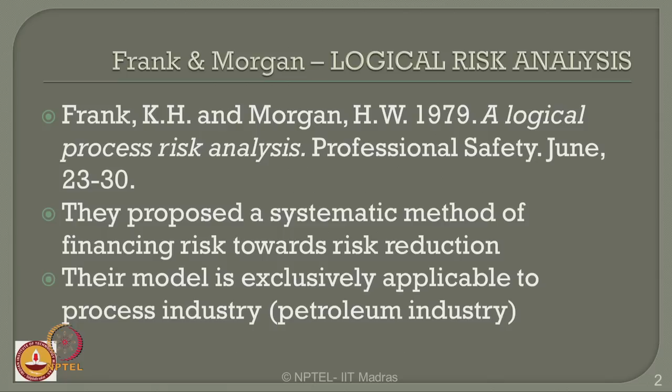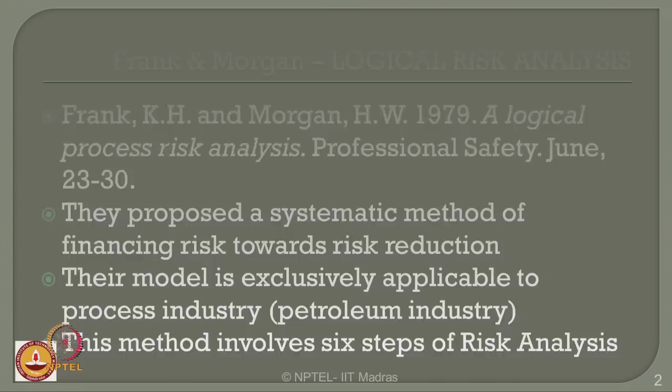Their model is exclusively applicable to any process industry, and we all agree that the oil and gas industry is a process industry. Therefore, one can apply this method to the oil and gas industry very interestingly. This method of course has 6 steps of risk analysis. Let us see them one by one quickly. In step number 1, you compute the risk index of each department.

One can ask me a question, what do we mean by department? You know, every production unit has got different segments. For example, inventory, stores management, sales, personnel safety, production unit, drilling. So, there can be different departments in every production unit. So, let us say I want to calculate the risk index of every department.

In the next step, I estimate the relative risk of each department. I will compare every department with one another and try to estimate a relativity factor between departments. Then I will compute the risk index in percentage, that is why it is called percent risk index for each department. Then one will compute the composite exposure dollars for each department. In this step we are converting the analyzed risk to economical terms, that is why we say exposure dollars.

Then you compute composite risk for every department. Once you do this, in the last step you rank the departments based upon relative risk score. So, one has to actually rate the department depending upon the risk score. We will take up an example and solve it and see how the different departments can be relatively ranked purely in terms of risk analysis.

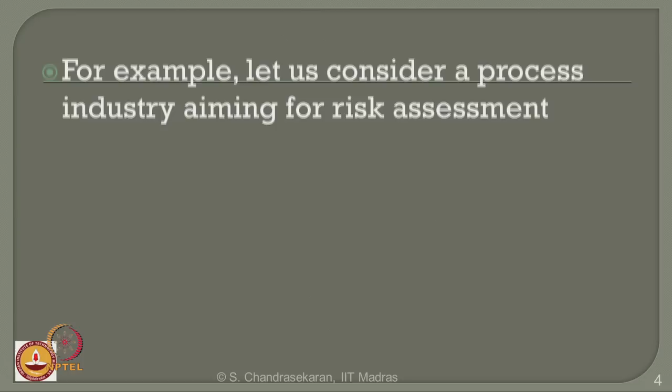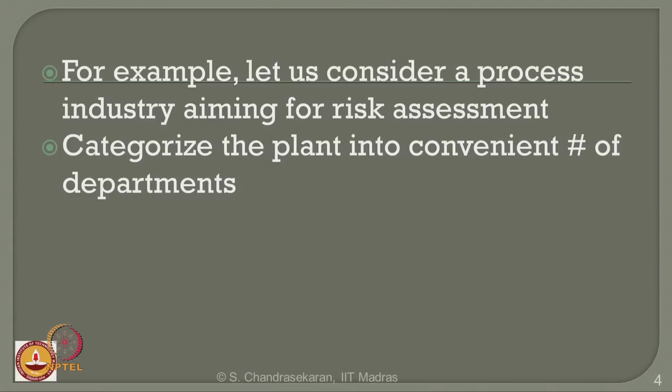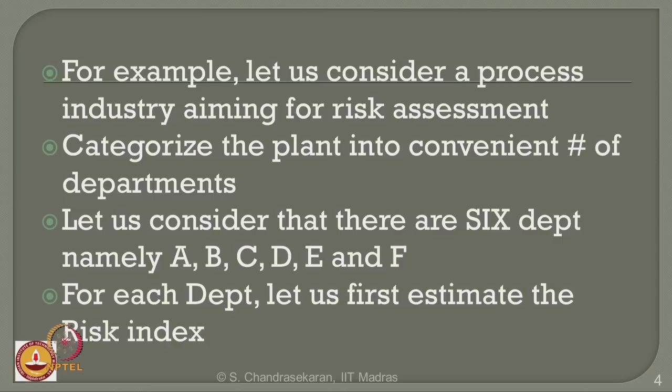Let us consider a process industry aiming for risk assessment. Categorize this industry or the plant into a convenient number of departments. Let us say there are 6 departments in a given plant, named A, B, C, D, E and F. For each department, let us first compute the risk index.

Now, the question comes, what is a risk index? Each department inherently has a risk level. This is to be first identified. It can be done by evaluating hazards present and the control measures available within the department. So, every department has hazardous scenarios in their presence. There are of course control measures available within each department. Comparing these two, I can always calculate the risk level of each department.

This is also otherwise called first level of risk assessment in every department. Generally, it is done by ascertaining this from a checklist. A sample checklist developed by Morgan will be shown in the next slide. So, based upon this, one can establish a hazard score and a control score. This is a sample list which is shown to you to ascertain the hazard score and the control score.

The hazard score or the hazard group, there are 6 groups here: 1, 2, 3, 4, 5 and 6 groups. For example, the first group is on a 10-point scale of weightage, which is on fire and explosion potential. The second is on complexity of the process on an 8-point weighted scale, stability of the process, operating pressure involved, personal environmental hazard potential existing and high temperature problems. Each division has a specific weightage of 10, 8, 7, 6, 4 and 2 respectively. Each one of them has got different categories within them. Each category has got a relative weightage.

So, what I have got to do is, if my specific department in a given plant has a large inventory of flammables, then I will take that score as 2, multiply that by 10 and form this value as 20. If I have large inventory flammables and also they are generally distributed within the department and they are not localized, then my score will be 2 plus 2, 4, multiply with the weightage, it becomes 40. So, for every group I can now find out the score of hazard. Once I do this, then I will estimate what is the control score.

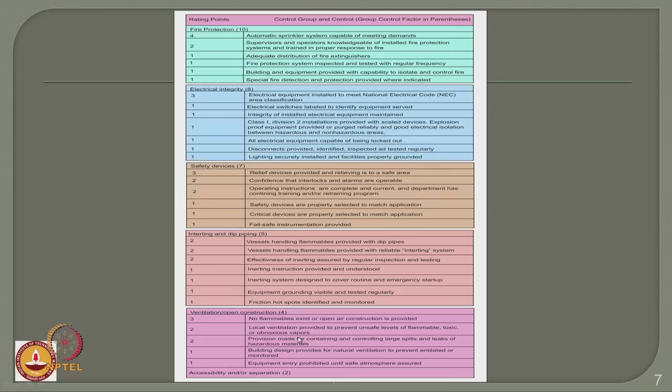Then for example, if your department has an automatic sprinkler system in position, then your control score for that group will be 4. Since the weightage of fire protection is 10, your control score for this group now becomes 40. If your department also has adequate distribution of fire extinguishers in the entire area of working, then you have an additional score of 1. So, your total score becomes 5 because 4 plus 1 is 5, multiply this with 10, you get 50. So, for every group one can easily calculate these scores as a control score. From the previous slide, one can calculate these scores as a hazard score. Compare these two scores to form risk index.

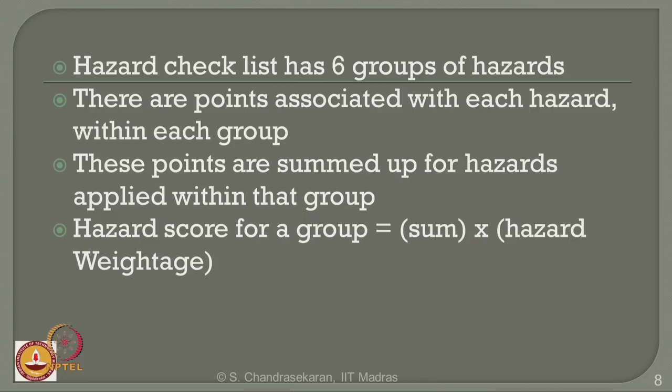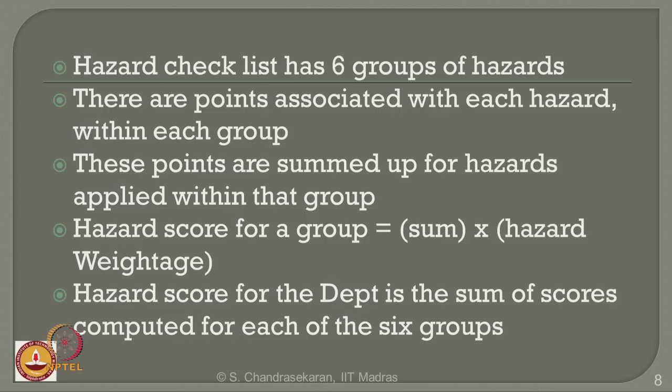So, hazard checklist has 6 groups, they are associated with each hazard. These points are summed up within that group. Therefore, hazard score can be simply the sum multiplied by the weightage for each group as I explained just now. So, hazard score for each department is now sum of the scores of all the 6 groups as you have seen in the last table. Similarly, you can also calculate the control score. The control score for every department is again the sum of scores of each of the 6 groups. Therefore, now the risk index can be computed for each department.

Risk index is control score minus hazard score. Please understand, it is not the difference between the control score and the hazard score. It is control score minus hazard score. One can ask an interesting question here. If my control score is higher than the hazard score for a given department, risk index will be positive. If my control score is lower than the hazard score for a given department, risk index can be negative. So, it is very simple, risk index can either be positive or negative. If the control score is exactly the same as the hazard score of the department, risk index can even become 0.

Now, I calculate relative risk. One can ask me a question, why I am interested in calculating relative risk. So far, I have been calculating risk index of every department in a given plant individually, but of course, I want to compare the departments. One can ask me a question, why should I compare the risk of every department within a given plant? Now, get back to the definition of safety. Safety is not only violation of individual personnel, but also a group of violations getting aligned for the organization together.

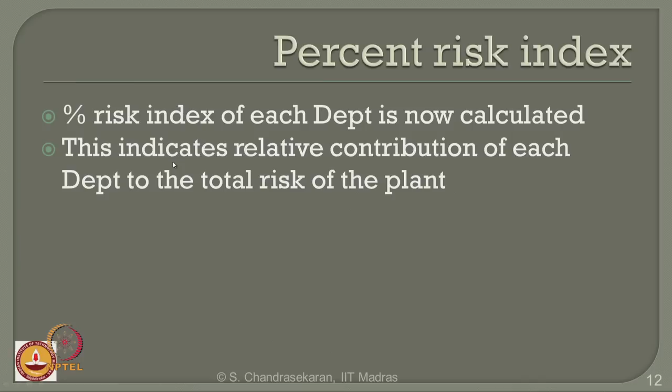It is very important to know here that every department will know its own contribution of risk to the overall plant. For example, A contributes 10% of risk, B contributes 20% of risk. So the department which contributes the maximum will have to be paid more attention by the organization. At this level itself, you will easily understand which department should be focused on in terms of safety assurance programs, or which department should be revisited for improvising safety in stringent terms.

So this level of analysis will also help the organization ascertain the level of safety being practiced in each department, as a control mechanism for awarding or rewarding each department.

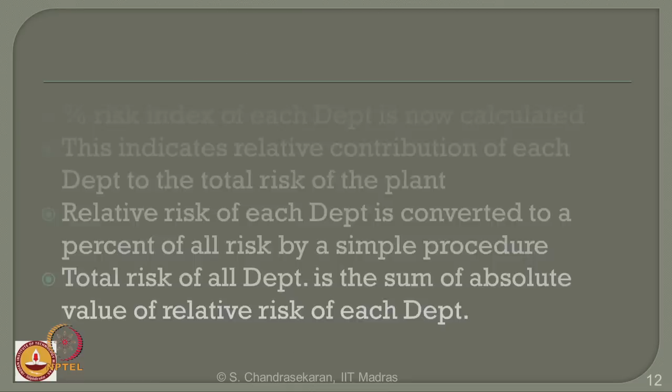Relative risk of each department is then converted to percentage by a simple procedure. The total risk of all departments will be the sum of the absolute value of relative risk of each department, which will amount to 100%. Now, one can ask me a question. So far we have ascertained the risk of individual departments and compared them on a relative scale. Where does the finance part enter here? Because Morgan focused on financing risk, Frank and Morgan.

Where is the financing part coming here? The financing part comes in this area of risk analysis, where I am going to say composite exposure dollars. There are three terms available here. Why composite? Why exposure? Why dollars?

Dollars indicate it is a financial aspect, the economical purview of risk analysis, whereas composite and exposure explain how risk is converted in terms of economy. The estimated risk is converted to financial values, estimating the financial value of risk for each department.

Composite has different segments involved in risk analysis, like property asset, business interruption, and personnel exposure. So three segments are involved in ascertaining risk. Each one is valued separately so that the total risk involved in terms of economy is also focused. Now, how do we estimate these components in terms of composite exposure dollars?

If we talk about property value, it is actually the estimated value of replacing the cost of all material and equipment which are at risk in each department.

There is an example here. There are 6 departments: A, B, C, D, E and F, where the hazard scores as explained earlier are computed, the control score as explained earlier are computed, the property value, business interruption, and composite score are computed, and this becomes an input table to do the risk analysis.

Either you can use Frank and Morgan's charts to compute the hazard score and control score of your department, or you can prepare your own chart to use these department scores separately. So this becomes input data for each department. I say this is the given data for the problem.

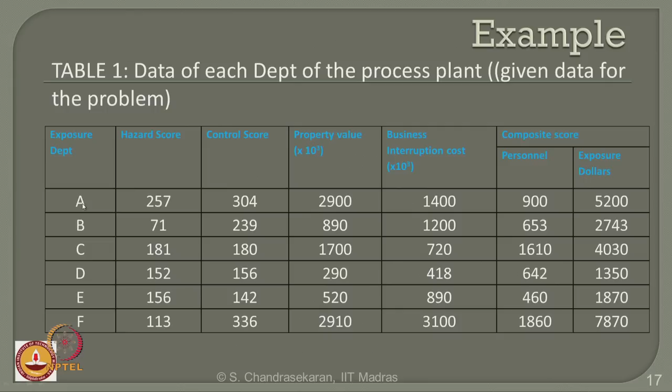Now I attach the values of these numbers which I took from the previous table. For example, plant A, department A has 5200. The exposure dollar scores of each department, A, B, C, etc., are worked out as input data which I transferred to the next table.

All these values I got are essentially input data which I computed from the known chart for every department. So now we have two levels of analysis. One, we now know amongst the given departments which department is contributing to the maximum risk of the whole plant. We also know the asset and involvement of the department in terms of money.

Here it is exposure dollars, and for realistic figures I have multiplied these numbers by 10 power 3. So these numbers are not simply $5,200, they are 5200 times 10 power 3 US dollars. That is the commercial meaning of these numbers.

Now very interestingly, if you look here, department E had the maximum percentage risk. Since the inventory, property asset, manufacturing, or personnel involved in department E amounts to only 1870, compared to department A, which has the highest.

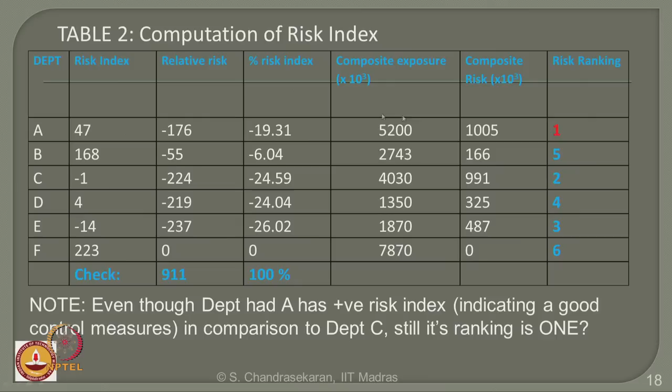So this analysis not only discusses the risk involvement in the department, it also tells me how the risk can be converted into economical terms, which is very important for any production plant like the oil and gas industry.

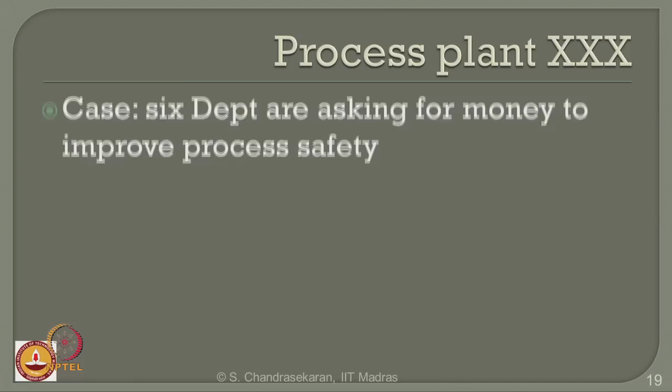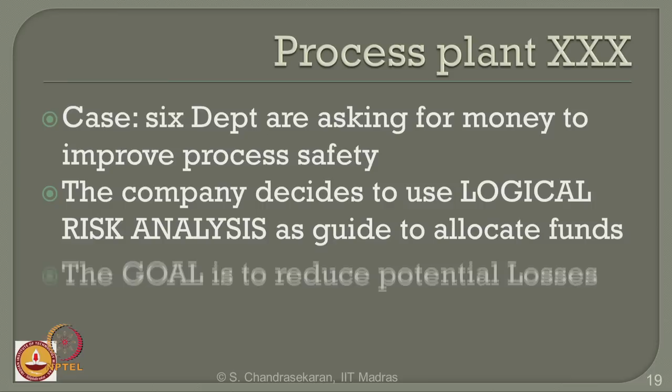Let us take another example, a process plant XXX. Six departments are asking for money to improve process safety in a given plant. The company decides to use logical risk analysis as a guide to allocate funds from the budget. The goal of the company is to reduce the potential loss. Morgan's method is one of the best tools employed for solving such problems.

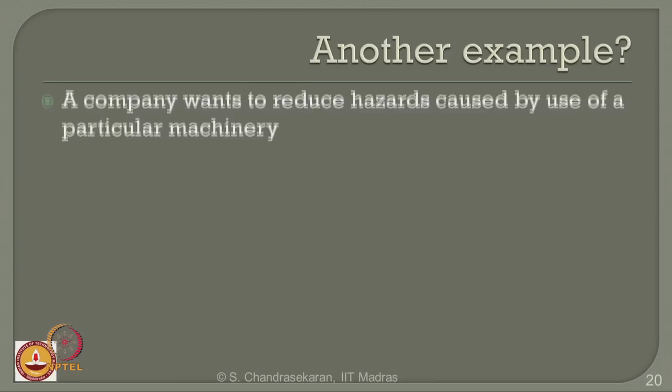Let us take another example. A company wants to reduce hazards caused by use of a particular machinery. It is a new machine which has a high potential for accidents, so it must be operated with care.

Now there are 2 options available with the company. Option A: the company appoints a trained person all the time, 24/7, who will assist operation of the machine because he will be trained. Next, the company also proposes to fix an interlock to the machinery which will reduce such hazards so that accidents can be reduced.

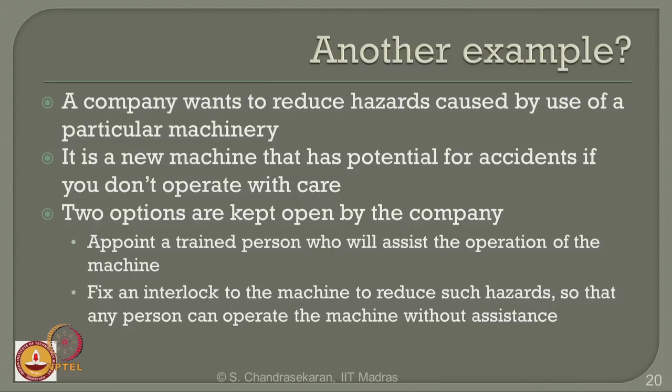So the company has 2 options. It can either hire a trained person round the clock so that the machine operation is done through the person, or by the person under the direction of an instructor, or the mechanism can be with an interlock. Let us see which is the better mechanism by which risk can be reduced.

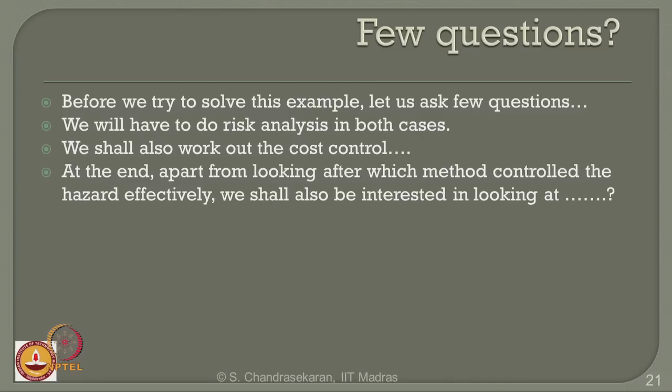Now, there are few questions asked before we solve this problem. Before we try to solve this problem, we will have to do risk analysis in both the cases, option A, option B; both risk analyses are mandatory. We shall also work out the cost control in both the cases because that is important. At the end, apart from looking at which method controls the hazard effectively, we should also see another factor which is very important for an investor.

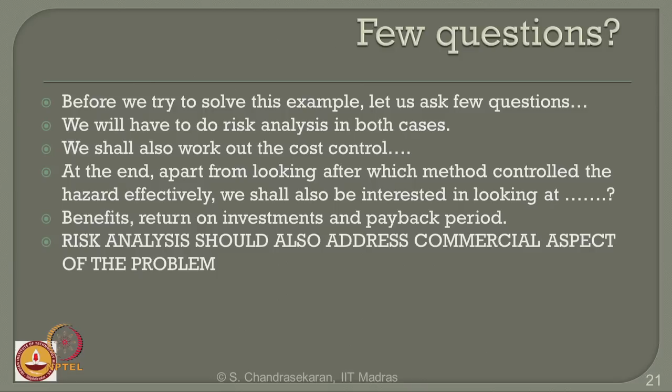What is that factor? The factor is what is the benefit I derive, what is the return on investment I get, what is the payback period I get on my investment. That is very important. The risk analysis therefore should also focus on the commercial aspect of the problem. Risk mitigation and reduction without knowing the financial impact is not useful in all companies.

So, let us solve this example. I have got 2 options, option A and option B. Step A says hazard using a machinery. Frequency per year in both the cases is 3 and 3. I want to maintain both of them the same so that there is no difference between option A, using a trainer, and option B, using an interlock to the machinery.

Let us see what is the severity of an accident, that is, expected loss every year. I want to keep the expected loss in both the cases the same so that I can compare them very easily. Now, I want to see what is the risk involved in each case. Risk involved is actually the product of these two, because we know risk is a product of frequency and consequence. I want to keep both the risk levels the same, but I really want to know which option will be better for a financial investor as well as for a manager.

Then I say what is the control mechanism available. In option A, I employ a trainer. In option B, I put an interlock. Therefore, the control effectiveness in both the cases should depend on what is the initial investment. The investment is higher in option A because I have got to hire this person round the clock, whereas the cost of this lock can be cheaper because this can be bargained when you purchase the machinery.

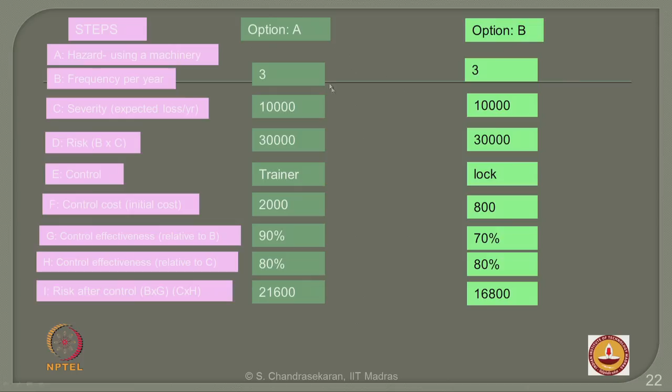Risk after control is nothing but the product of effectiveness of the cost and effectiveness of control. So B product G multiplied with C product H. I compute this, and now there is a significant difference, and risk after control is higher in case of option A compared to that of option B.

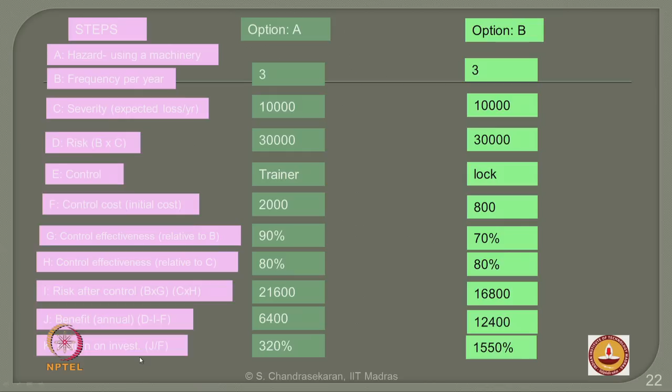Now what is the benefit annual which is drawn from this? So it is nothing but the risk involved minus the investment minus the control effectiveness. I get this value as 6400, whereas the benefit I draw from option B is much higher than that of option A. Now what is the return on investment? That is very interesting. I may derive a higher benefit, but am I able to get the return much higher? I have calculated this as percentage.

One can ask a question, how have I done that? Okay, what is the payback period? How would you do that? It is very interesting. I have derived a benefit of 6400 in a year, that is 533 per month. Therefore I have invested 2000 rupees, approximately I will get this money back in 4 months, whereas here I have invested only 800 rupees, I will get this money back in just 3 weeks.

So return on investment or payback period becomes a very important aspect of any mechanism or any plant or any investor who controls risk. So this is a very interesting example where risk control mechanism has been given a complete illustration in terms of economic perspective.

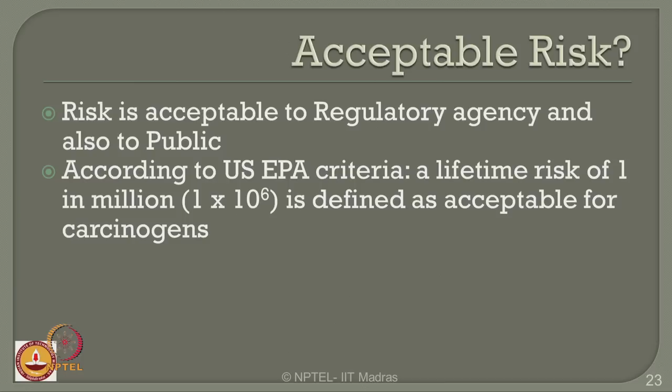Once we understand this, we should also agree that there is some acceptable level of risk in oil and gas industry. Risk is acceptable to regulatory agency and also to public. According to US EPA criteria, a lifetime risk of 1 in million is defined as acceptable risk for carcinogens. For non-carcinogens, this acceptable level of risk is hazard index of less than 1. According to UK Health and Safety Executive, the acceptable FAR is 1.0. These are acceptable risk statements.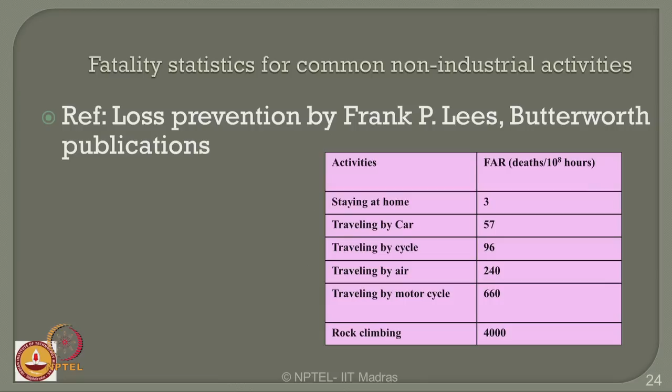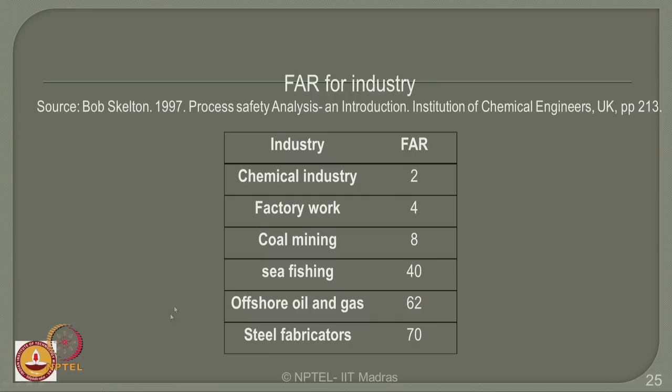Now one can ask a question, why traveling by motorcycle compared to that of air has got a higher risk index, or let us say FAR. So remember, FAR depends upon the exposure time of risk. If the exposure time of the person involved is larger and larger, the FAR goes higher and higher. FAR for different industry is also given. Chemical industry is 2, oil and gas industry has got a very high FAR of 62.

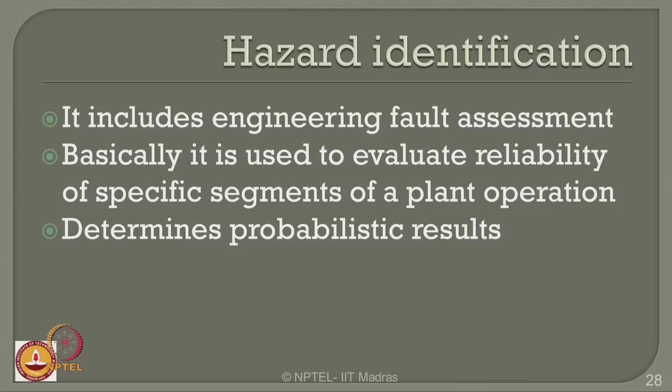Let us now take a specific case of risk assessment. Let us take an example of a process plant, which is a chemical plant. National Academy of Sciences identified 4 steps in chemical risk assessment: hazard identification, dose response assessment, exposure assessment, and risk characterization. Hazard identification includes engineering fault assessment. Basically, it is used to evaluate reliability of specific segments of the plant operation, determines probabilistic results, and the method employed is fault tree analysis.

Dose response involves describing quantitative relationship between the amount of exposure and extent of toxic injury. Hazard of material is to be recognized beforehand before they are assessed. Outcome is a linear equation relating exposure to diseases. Method is regression analysis for dose response data.

Exposure assessment depends on nature and size of population, its magnitude and duration of exposure. Assessment includes analysis of toxicants in air, water or food, and risk characterization depends on integration of data and analysis. It determines whether people will experience effects of exposure or not. It includes estimating uncertainties associated with the entire process of risk assessment.

There are certain issues when you start applying this risk assessment in reality. Risk assessment often relies on inadequate scientific information or lack of data. For example, any data related to repair cannot be used for newly designed equipment. It means even though the data available is less, all of the available data cannot be used because they do not quantify the risk in a proper manner.

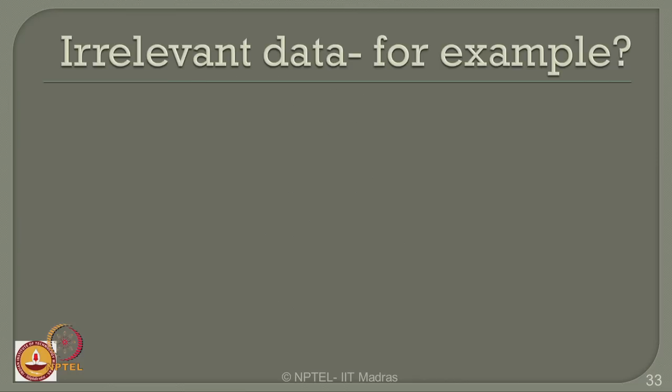There are some irrelevant data also available. For example, in toxicological risk assessments, we generally find data related to their use in animals, but we cannot use them directly to compute the effect on human beings. So, then how do we actually do risk assessment?

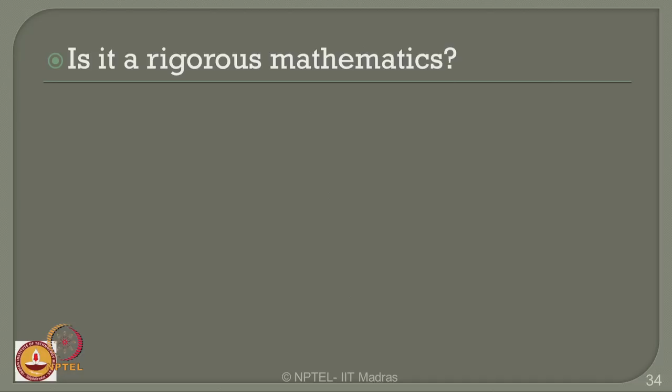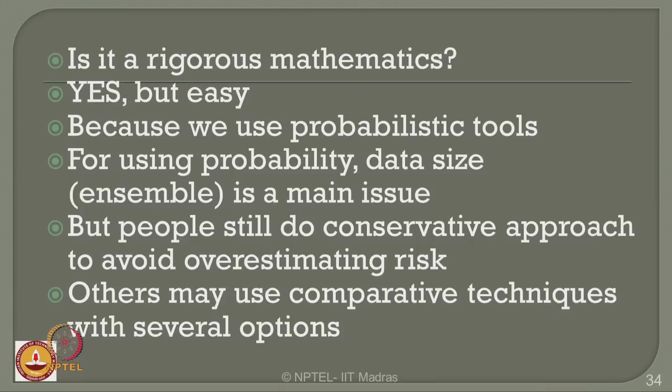Is it rigorous mathematics? The answer is yes, but it is very easy because we use probabilistic tools to solve them. For using probability, data size ensemble is a very main issue, but people still do a conservative approach to avoid overestimating risk. Others may use comparative techniques with several options. What is the conservative approach?

How do we do quantitative risk assessment? We identify the frequency of an event, its severity, we calculate risk rankings, we assign them to get risk order, we call it risk management, and then we use comparison techniques to qualitatively do risk assessment. We conduct surveys for qualitative risk assessment, we prepare a series of questionnaires, we do risk ranking based on this

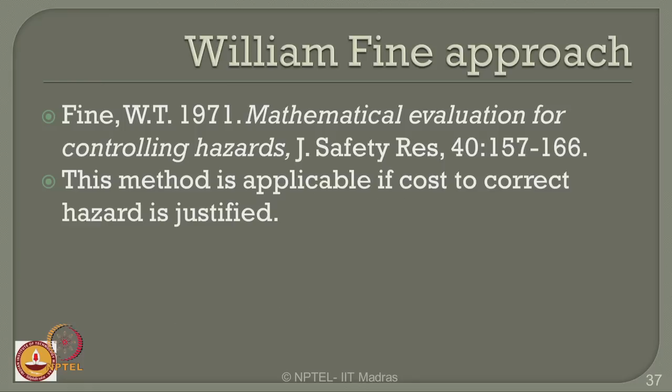and do QRA. William Fine has given a very interesting approach to quantify risk assessment in 1971, as the reference is available there. This method is applicable only if the cost to correct the hazard is justified. It also suggests how quickly hazards should be corrected. This method involves use of risk assessment by an example.

If the risk score falls between 200 to 1500, you must have immediate corrective action. If it is between 90 to 199, it requires attention as soon as possible. If it is less than 89, the hazard should be eliminated without delay. So, let us do an example of this. CEP values are selected from the table, cost justification is estimated. If J is greater than 10, then cost is justified.

This method is used only for guidance. The values given in the table are only indicative. You can also prepare your own table depending upon the surveys you conduct periodically. We will apply this method now for a simple offshore drilling rig accident. Consequence for this accident is 100 because the accidents are catastrophic. The exposure is 1 because they are very rare. These values are taken from the table.

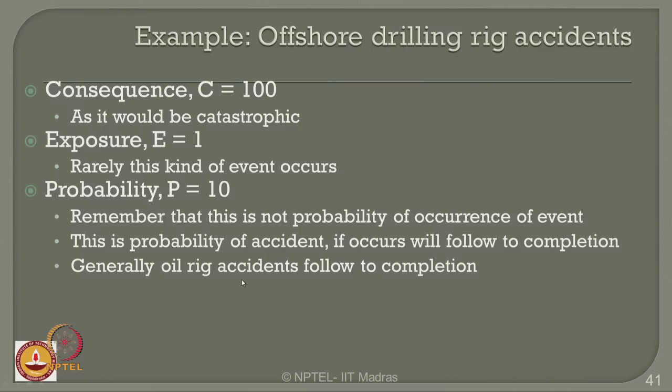Probability of accidents is 10. Remember, this is not the probability of occurrence of the event. This is the probability of the accident; if it occurs, it completes in general. So, every offshore rig accident, when initiated, is completed totally. Therefore, a number of 10 is given here. So, risk score is a product of CEP, which gives 1000.

J is computed as R divided by CF and DC. The cost factor is 10 in this case and the degree of correction is 6 in this case. Therefore, my J comes to 16.66, which is greater than 10. It means that the cost spent on risk reduction in drilling accidents is justifiable. Since the risk score R is 1000, immediate correction is required.

Therefore, it is very alarming because detailed risk analysis is a mandate in this case, and offshore drilling industries should conduct third party HSE audits once every year to assess risk. So, this example easily tells you how to compute the hazard score, the cost factor and cost justification, because cost justification becomes a very important parameter in case of risk investment in any industry.